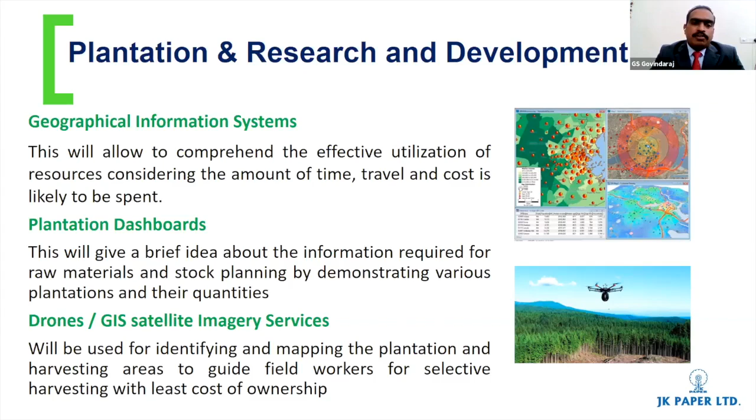While we get the raw material from only about 200 kilometers around our operations, we have wide varieties of quality, yield and age of the harvested materials. Therefore it's important for us to digitally keep the information available for the field workers to selectively harvest, for the better benefit of having the material at the mill side. We are exploring satellite imagery services and drone applications for monitoring these processes. Next, please.

Recovery area. It's very important for us to get quality pulp with better brightness and viscosity and lower fine fractions. As we increase the complexity by adding more and more varieties of wood logs with various ages, received from various locations and different seasonality, the characteristics of the pulp also differ. So by keeping all the information digitally ready, we are able to have better optimization of cycle time. Digesters is one of the key projects we are working on.

There is another big opportunity in the industry, which is having better utility balancing.

In the integrated pulp mills, we don't have the cogeneration. So we used to meet the energy demand for the pulp and paper industry from the boilers. At the same time, we also get the steam from the recovery boilers. How do we balance while having multiple machines drawing the steam and other energy requirements at various periods with varying quantities? So there becomes another big opportunity area for analytics to pitch in.

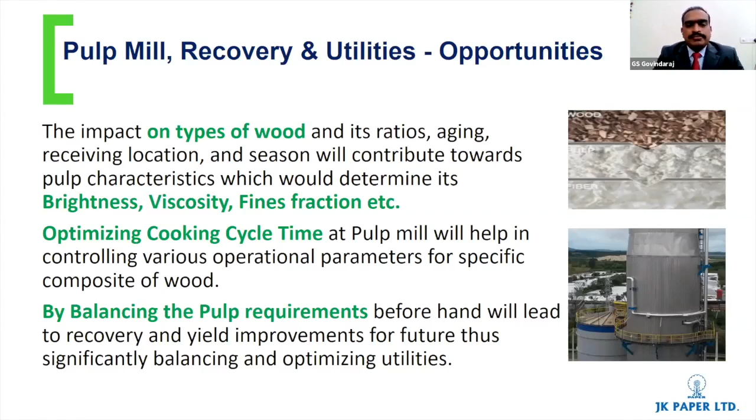Next, please. Production planning and scheduling is another big area. In the Indian market, we do have very small volumes also being serviced in the markets. So we do take care of serving those small customers as well. And therefore, deckle optimization, collecting those small serviceable customers, is another important element. Deckle optimization has been there in the pulp and paper industry for quite some time, so it's not something new we talk about.

But it's not only the trim optimization, but how to simultaneously optimize multiple KPIs, including sheeter utilization, for better order fill with no higher levels of inventory being maintained. And how do we reduce the setup times in the rewinders and sheeters? So there are ample opportunities. Are we moving away from linear programming to global optimizations? Some work is being done by our organization in this area.

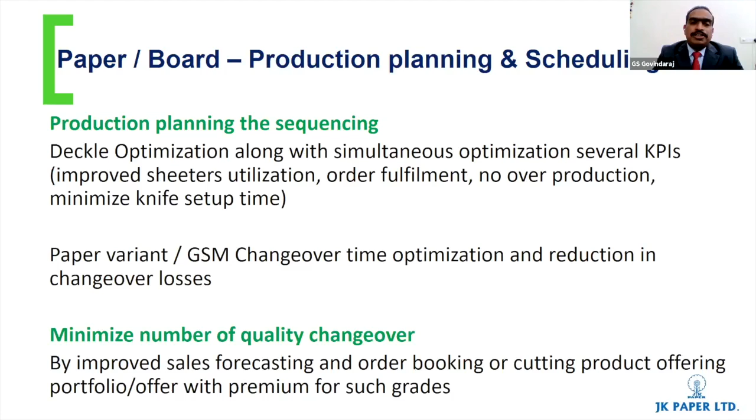We also have a single machine producing multiple grades and GSM of products. In a single machine, we produce about 30 qualities. So it's important for us to have the minimum quality changeover time to service the customers, and at the same time, maximum time available for good production. With better sales forecasting, using tools like planning and scheduling, we should be in a position to reduce the quality changeover time as well. Next, please.

In the stock preparation area, we also have an ample opportunity. While we have state-of-the-art technology and caliper control in some of the machines, in some machines we see this opportunity to have control over GSM losses. There is another opportunity in the area of chemical consumption. While having a variety of manufacturing capabilities, we should have very fine control of chemical applications. Given the quality of pulp and other characteristics and what the customer wants, the back-end support can come from analytics. Next, please.

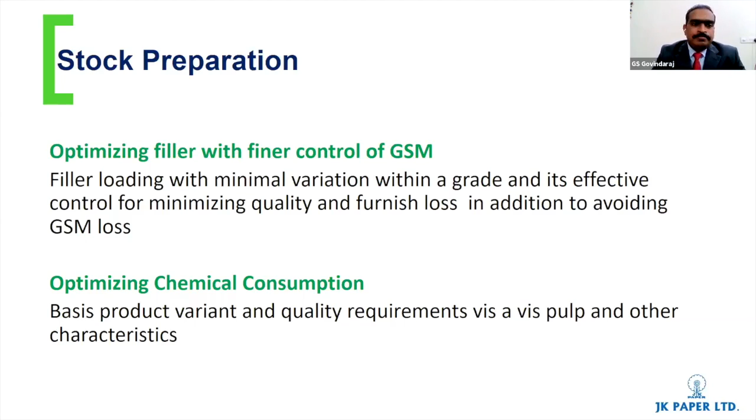This is one of the areas where we see a huge opportunity again. Various pulp mills and paper machines have various lines of converting. At a single point in time, we also see the overall equipment effectiveness, how the machines are being operated. In order to improve utilization, we need better monitoring and control, and therefore there is an opportunity. With individual machines connected, big data can give you a lot of insights.

Another area we are looking into is transport optimization. While planning dispatches, how we load our reels and bundles in a single truck to meet the customers with a single touch, not multiple touches, thereby avoiding future damages. So these are the areas I thought to talk about from the manufacturing point of view.

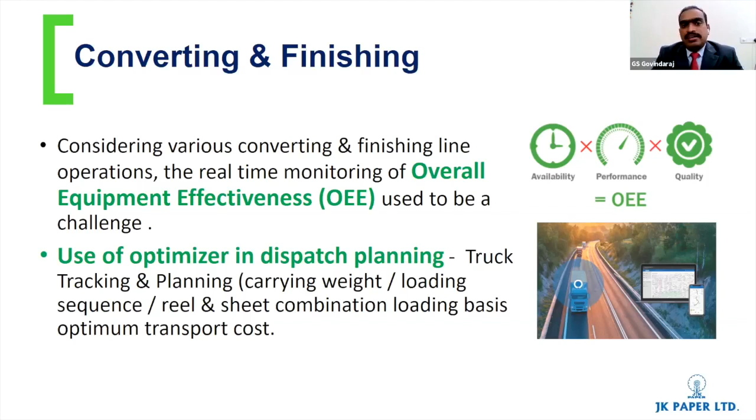While the pulp and paper industry is very old, we see only about 20 to 30% of the mills having state-of-the-art technologies with Industry 4.0 connectivity along with the machines. The rest, 70%, are still on old legacy systems. Even in JK, we have equipment which is 45 to 50 years old, and therefore the cost of its maintenance is becoming an important element. Next slide, please.

This brings up the topic of maintenance. With aging and deterioration taking place and the cost of maintenance going higher and higher, it's all the more important for us to bring in predictive maintenance tools and techniques in order to have better asset care. With this brief intro of the various areas, I would like to bring up the top challenges for the industry.

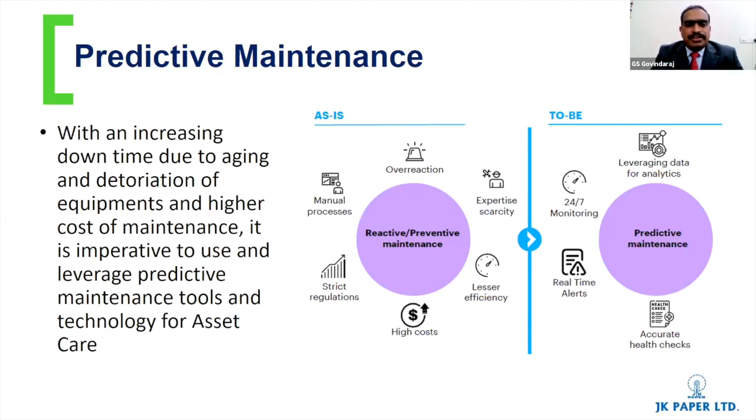While we saw the raw material acquisition and various resources management are the two critical and the biggest challenges in the industry, there are ample opportunities with the analytics support. We are able to bring value to the business. We are seeing certain initial benefits already.

Big challenge is on maintaining the consistency in our delivery. As a customer, I would always like to get quality, the right price, the right time. And therefore, having this, as a sales organization, we have to build the capabilities to deliver. So this becomes an important challenge.

And the third is increased demand. Some organizations are already investing in bringing the new capacities. At the same time, all the other assets are put into stress. In order to improve the productivity, we need to also have interruption-free operations. So the higher the variability is bad for quality.

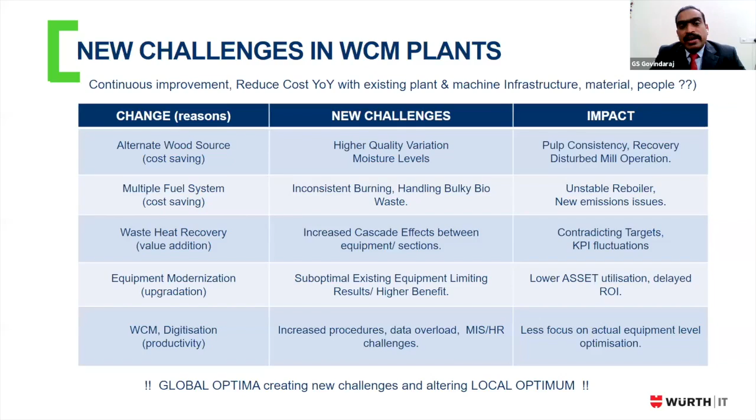So all the more important, we work with the right partners to help us in bringing the visibility to the processes and create a new value for the organization. And we were working with Würth in the earlier past and current. There were also GSM related projects we are working with Würth. Thank you for the opportunity for me to share some of the key challenges in the industry in this forum.

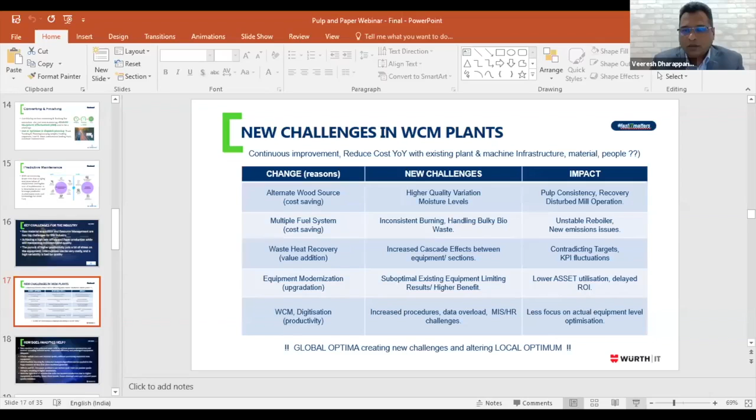I'd like Mr. Veeresh to take on the next set of processes. Thank you, Mr. Govindraj. Indeed, it was a very, very insightful session. And we pass on the baton to Mr. Veeresh. Veeresh, the podium is all yours. Sure. Thank you, Mr. Govindraj. Thank you, Nikita. I hope I am audible. And I think, Nikita, you should stop sharing, so that I can share my screen. Yeah, I assume you are able to see my screen. Yes, we can. Sure.

So once again, thank you, Mr. Govindraj, and we'll try to address at least two of those key challenge areas, where one of them we are already working with you. Of course, the resource management is very strategic and core to the paper process, that really relies upon the organization, how they want to cultivate their resources. So at least on the two other challenges, we'll try to address how technology can help.

So, we usually like to keep this particular slide, which actually starts with what are the world-class manufacturing initiatives that the pulp and paper manufacturers take, and how does it impact the global optima versus the local optima. As most of us are into the operational excellence and manufacturing excellence field, we definitely remember Eli Goldratt, who talks about illusion in the local optima in his book Theory of Constraints. So building on that, there are multiple decisions that are made on the global perspective to actually get more business benefits.

So here, what we see is the multiple initiatives we take on a global level for cost savings and value addition by adding new processes and modernizing the equipment. Of course, it creates a lot of impact, no doubt about it, with respect to all these business benefits. What it does impact is on the ground level, which we call the local optima, where the efficiencies are tweaked. And we all know that the operations team are still expected to get the same efficiencies as before we did all these modifications.

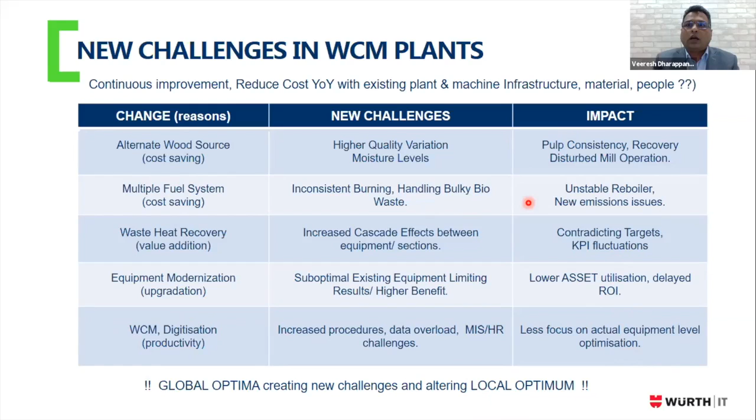That is where we feel that technology could come in, by utilizing the plant data information, how we could provide value, and more importantly with no capex, which Mr. Govindraj also touched upon. So how does this help? We all know that there is a humongous amount of data that is already available in the plants. So how can we utilize that information? How can we correlate that information with the production data, plus the quality information, process information versus the controller information, and this gives us a lot of data as a core to analytics and create value.

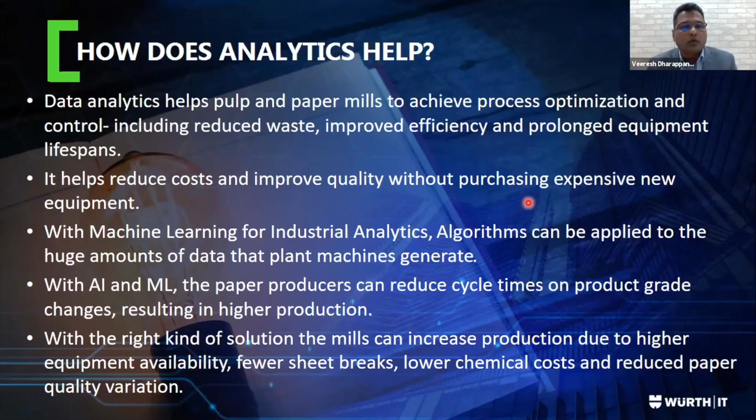And we as an organization have developed a tool which will get insights from all this information using scientific based algorithms, machine learning models, and provide value. So in this presentation, we would also like to touch upon what is the overall process, and also give visibility on a few case studies using the technology, how we would resolve some of the challenges.

So we would start with the typical plant automation landscape. So bare minimum, we always have SCADA systems. I'm considering the legacy plants, which are older plants, which Mr. Govindraj touched about, 40, 45-year-old plants, etc. At least on a bare minimum, they would have SCADA. And we have seen that most of the plants have DCS systems, and they are able to manage. They also included the energy management systems. We know that it's a very energy intensive industry. So most of us have captive power plants internally, or we have a captive power source coming in.

We have also seen that the power plants are a bit segregated from the core process unit, and they have their own systems, and seldom they talk to the process systems, only if they have a concept called a central control room. We also see a lot of analysis being done on vibration. There are lab information management systems, quality management systems, and maintenance management systems.

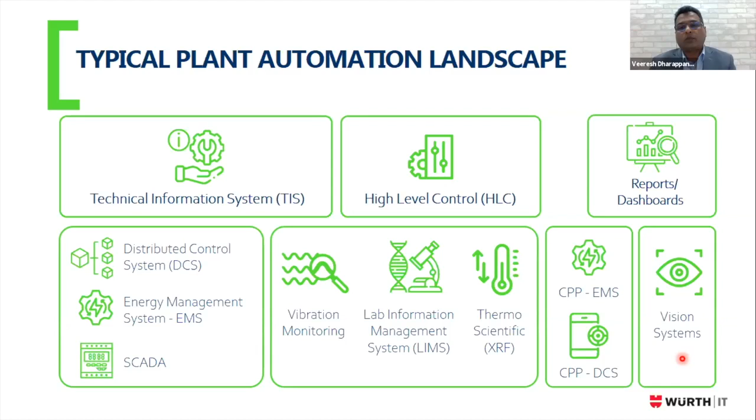But so, in a nutshell, with this kind of whole landscape, plants are able to churn out a lot of data, which we know is rarely utilized.

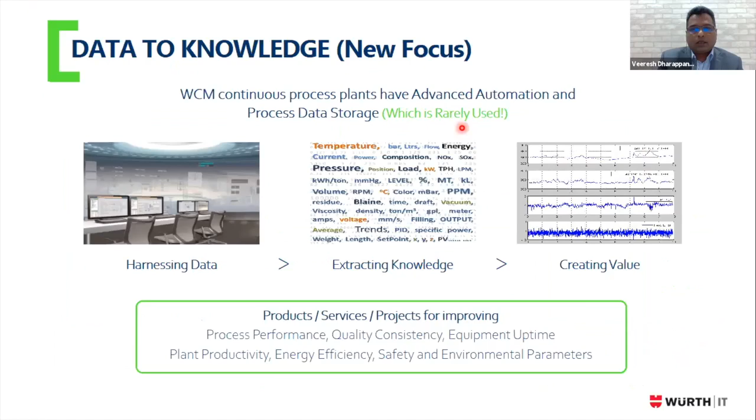So here we come and we look at all this information. What this pyramid talks about is, if I go to the top of the pyramid, it is more or less the systems which have some kind of manual interface, be it TQMs, MIS, and then ERPs of the world, which are utilized by the higher ups. And here they would like to measure the performance in key KPIs. If I go to the HO, which has multiple plants like JK Paper, the headquarters would measure not more than five parameters.

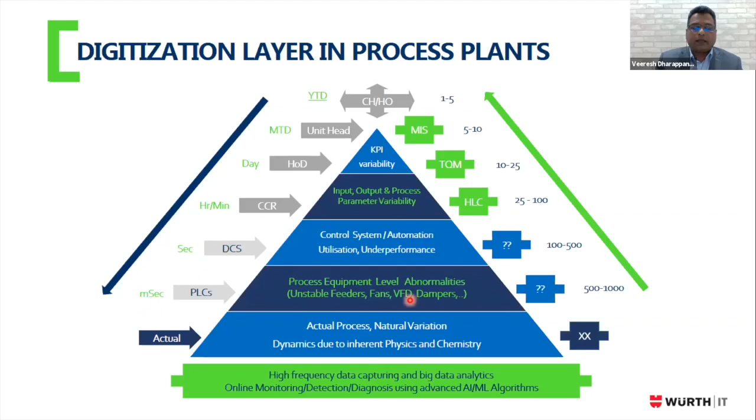So here we come. The value that is missed over here is the data that is at millisecond and second level. This is a kind of gold mine with respect to looking at very minor variations that happen in the process, and how we could address those. This is where we come in, and technology actually helps in terms of collecting that data and doing analytics on top of that information.

So how do we do the overall process? We have an algorithm-based software product tool, and what it does is it collects the information within the process. We not only look at the control level analysis, but we also look at external analysis, either upstream or downstream issues.

Also looking at the mechanical perspective, whether systems like dampers and valves are performing fine, because this data is already available in the DCS. We also look at sensor level information—is our sensor performing fine? So all this data put together, with various dimensions, we are able to reduce the variations in the overall process.

Here we come. With our tool, we immediately provide value in terms of reducing the fluctuations and variation, which provides better margin for the control room operators, as well as for plants that have invested in systems like higher level controllers or advanced process controllers, etc. Those controllers would also function fine, because they also get more margin to operate.

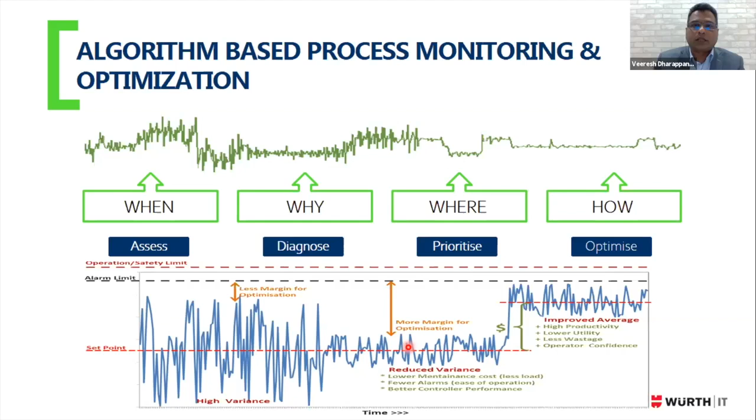Now, how do we execute this? Multiple ways. As we saw, the plants are equipped with DCS, SCADA, and historians, and we prefer to look at the data in a seconds-level format. At least between, in rare cases we love seconds-level data, but up to 5 to 7 seconds, or 10 seconds data, is also acceptable. So we would look at integrating our edge gateway with communication protocols like OPC UA or DA, which might be available. If not, we can go the manual route of getting the data in an Excel sheet or CSV and then do the analytics.

So once we start providing value, manufacturers usually come to us for multiple other value additions, where they also want us to map the data with line of business applications like ERP systems, maintenance systems, and quality systems. Having that provides tremendous value. And once the analytics is done, we can also pass the information back to the plant team so that they can take actions immediately.

In my last slide, you might have seen that we talk no capex is something we heavily endorse, and the beauty of the technology is you don't need to upgrade any equipment or buy new sensors. So with whatever we have, we try to optimize in the same scenarios. Here it's a very bold statement that we make: the payback period.

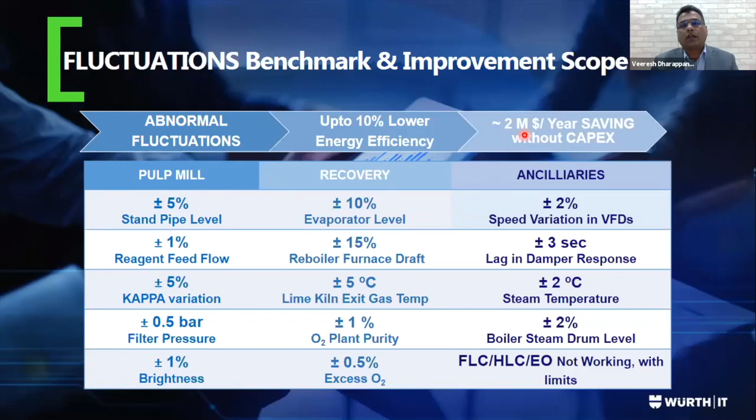What we have seen is there are heat, steam, and energy savings, and considering an integrated pulp and paper mill, we predict that only in the pulping process there are anywhere between 300 to 500 control loops, and over 2,000 data points coming in. If I look at the entire integrated pulp and paper mill process, we would encounter at least 1,500 plus loops. So that gives us a lot of opportunity.

Every loop has anywhere between 4 to 7 parameters, and it's very difficult for control engineers to check every loop and every parameter and take action. It is humanly not possible. Even if organizations have incorporated APCs or HLC systems, the HLC system inherently works by assuming all variations are well in control, and then shifts the set points to control the process. But in this scenario, we have seen that operators actually take control and run the whole plant even after having such expensive equipment and systems in place.

These are section-wise overall scope that we have currently worked on, and you can see business benefits anywhere from 0.5 to 5%. We don't go at 20%, 25% because we are working within the limits of whatever systems and data we have, and we are providing value. There is lesser chance, or no chance, that we would come back to you asking for new equipment or a new sensor, unless the sensor is not working fine.

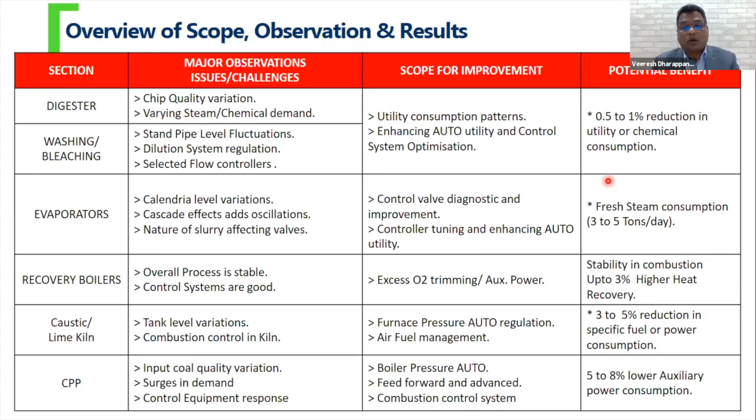So, one of the key value additions: I talked about 1,500 plus loops in the pulp and paper industry. So how do you know which loops are working fine and which are not? The beauty of our AI tool is, once you get all the information of the PID loops as an example, and we configure that loop data into the tool, it immediately gives us charts showing which loops are working fine and which are not, and the key reasons, because these are built with scientific algorithms and models so they can detect the performance of the PID systems.

So you can see over here, these two loops are having tuning issues. So we would ideally dig deeper into those 4 or 7 parameters to look at what we should tune. Is it a proportional or a gain, etc.

Once we get this information, our tool does a lot of analysis, and with that analytics, we come to a conclusion on what would be the key parameter for us to tune. We also have a simulation module, which creates a playground for us to do the experiments on the AI platform, and with 99.99% confidence, we go back to the plant teams to make those changes.

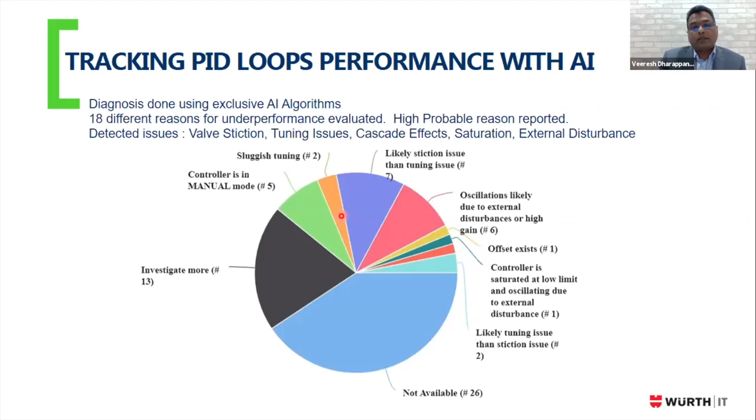And this is all possible without shutting down the plant. With a running plant, we are able to execute the recommendations.

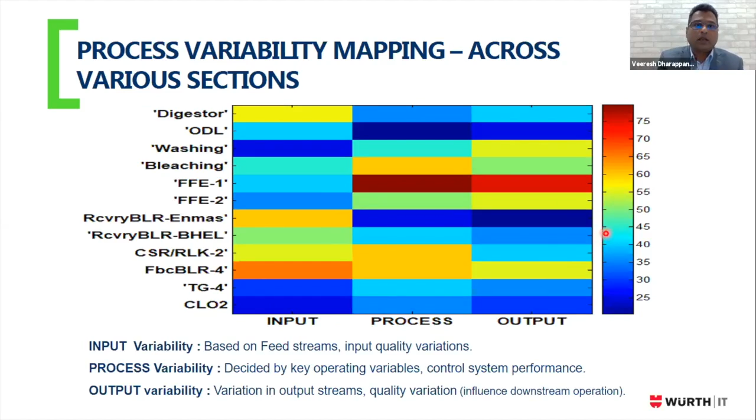However, having said that, we also work with legacy plants where there is still this amount of data coming in. This is where we map this information with the process data and try to dig deeper into getting more visibility.

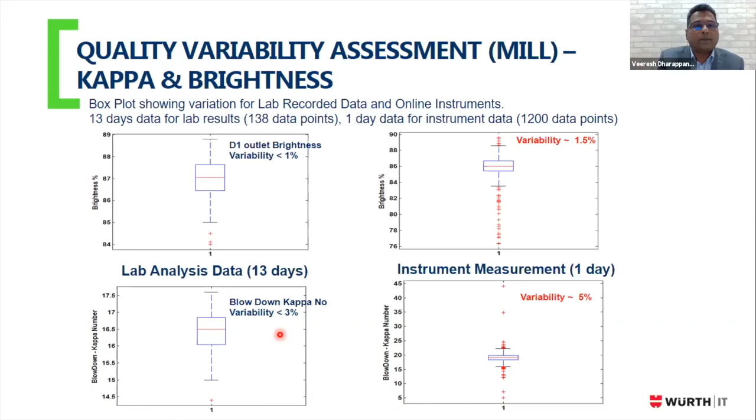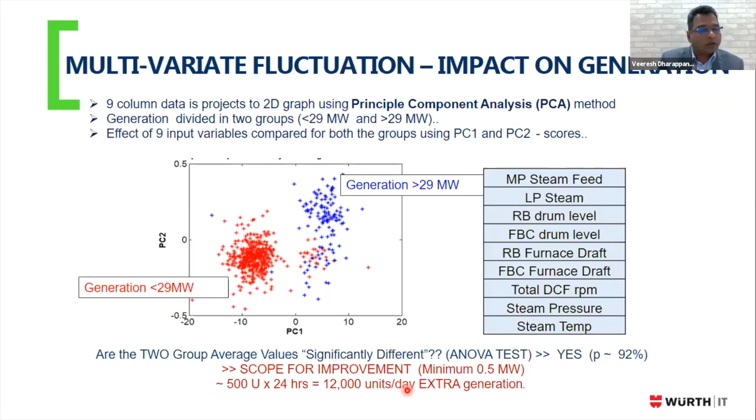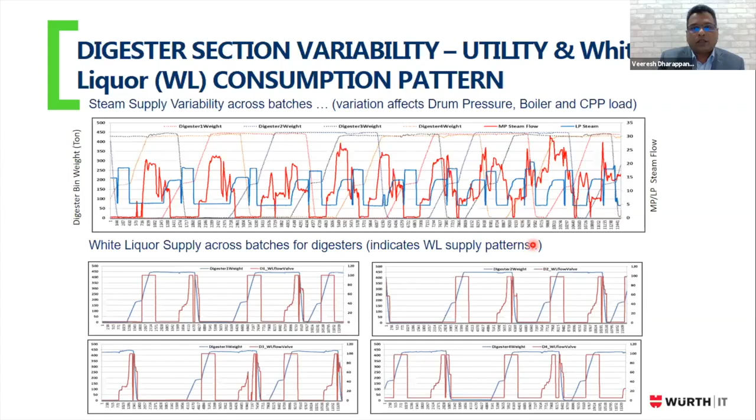So having this particular chart, we thought we are not able to read it. Now we need to simplify this particular information. So what we did is we converted that information into a simple table. So this gave us a lot of insight on looking at the chart in a very simplistic way, and looking at intra-digester and inter-digester. We could see, for example, MP steam, you are looking at 12% variation versus the inter-digester. This is the same digester, but it still has various variations.

So this gives us an idea that we should start looking at the MP steam, and the problem might be possibly in the discharge valve or the inlet valve. So if it is opening fine or not opening fine, we can start digging deeper into solving that particular problem.

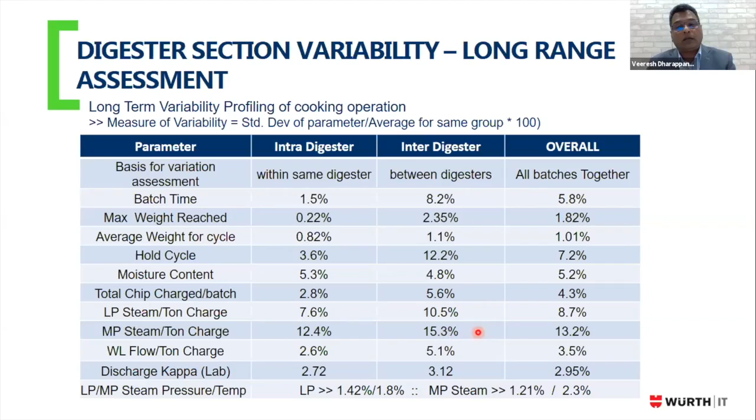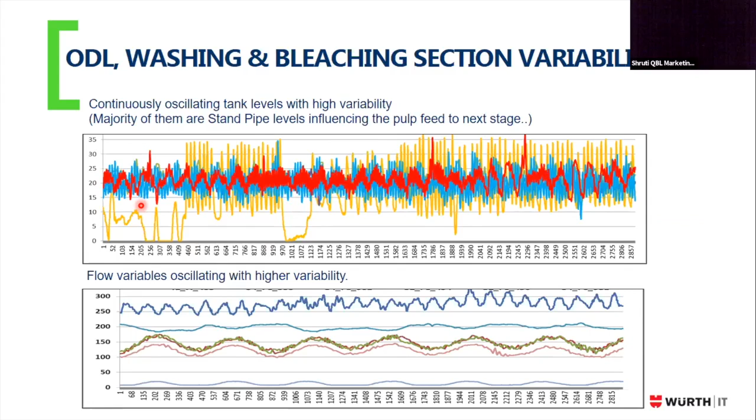Now this is the oxygen delignification process, washing and bleaching. This is a classical example where you have uniformity with respect to the variation. So what it means is there might be one particular issue that we may want to look at. So the other element in the analytics that we also bring to the table is not only looking at the data in the time series. Of course, most tools will be able to do time series data analysis. We also break it down into the frequency series as well.

So once we break it down into frequency series, we could see that there is a mirror image of the variations. Then we get a feeling that there is definitely a single point of error or a challenge or an issue that we need to look at and try to resolve. So these are some of the use cases that we thought we would share.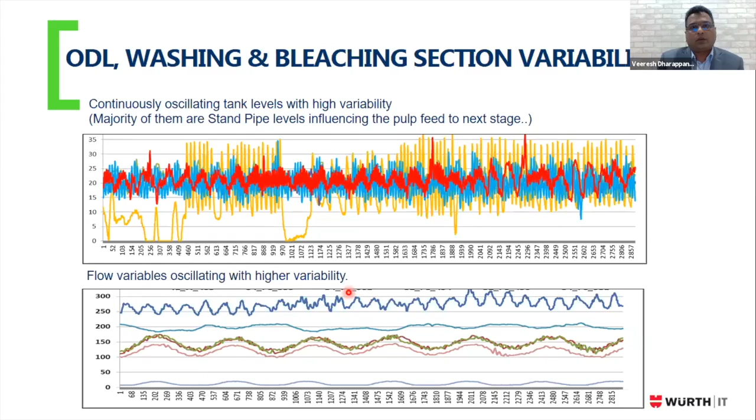Nikita, I will take a pause over here to take any questions that the audience may have. Sure, Veeresh. Thank you so much. It was a pretty interesting session, and you've really given us some very insightful points. We do have a couple of questions.

The first question is for Mr. Govindraj. So what are the digital transformation initiatives at JK Paper? It's a broader question. As I see, every process has been reviewed and opportunities have been identified. The journey started with mapping all the processes, and then we have bucketed them into marketing related, logistics related, manufacturing related, and so on. So in the business, we have found opportunities in every sphere of our business.

If you talk about any particular process, for example, supply chain, we look at inbound as well as outbound. How do we get visibility into the process, and therefore have certain meaningful inference in our daily decision making. I hope this answers it; the digital transformation we are taking on is not limited to one or two particular processes. It's the value chain.